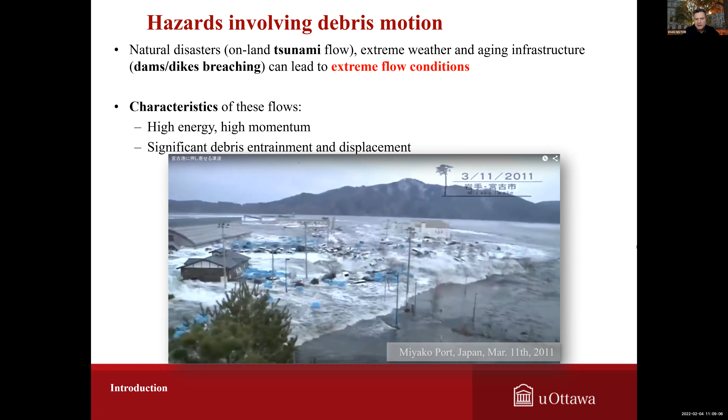This is a typical example in Miyako Port, a very small city on the coast of Japan, during the March 11, 2011 tsunami, where you see a lot of entrainment of containers and also cars located in this area.

So in terms of research problem, we're interested in debris loads and effects. We have two aspects: one is debris impact, single debris impact in the form of a dynamic load, so debris carried by the flow and impacting the building, as well as debris damming.

I'm going to illustrate what that means. It means the debris wrap around, for example, a structure, or accumulate on a piece of infrastructure, and then they exert a static load as the flow pushes in. They expand the area and the drag of this building. There is some flow acceleration effects, as well as scour induced around the building that can lead to failure.

Now, when we try to evaluate the influence of the debris, this is very difficult because, first of all, it's difficult to identify their location in the field and what happened to the buildings, because often buildings failed as a result of the debris impact.

There is a strong random nature of the debris motion, so it's hard to predict precisely how the debris are going to move in such a turbulent event. It's also hard to determine what the debris source was, unless we had pictures from before the event, and sometimes we did.

Also, due to the transient nature of the debris motion, they move sometimes erratically or randomly. We have sometimes faster flows, slower flows, and with the inertia associated with the debris and the presence of obstacles, it's difficult to assess their motion.

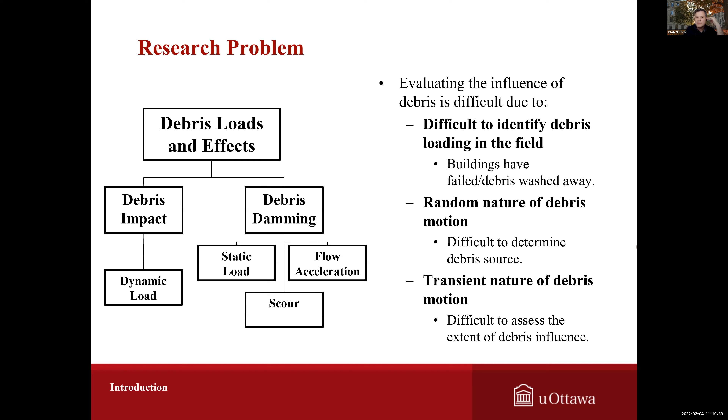Just a few words about tsunami for some of you that may not be familiar. I've done my PhD in Japan more than 25 years ago, and that's when I became interested in tsunami.

I come originally from Romania, a country that has only about 250 kilometers, or 150 miles, of coastline. So we have no debris, barely any big storms. But I was very curious about tsunamis because I was living in Yokohama.

The first training I did as a grad student was the training for tsunami and the training for earthquake, together with all the other international PhD students.

It comes from the Japanese word tsunami, which means harbor waves, because the Japanese noticed the occurrence of these waves whenever they came silently, since they didn't have any warning systems at the time.

But for the case of Japan particularly, people were able to somehow identify that whenever they had a large earthquake, possibly along the coastline, there would be a large tsunami. So people would be able to take refuge on higher ground.

One big exception was 1960, where the big earthquake in Chile, the largest earthquake ever recorded in recent decades, generated a tsunami that traveled almost 24 hours across the ocean and flooded regions in Tohoku, and people were actually killed in Japan because of this tsunami. From that time on, people installed tsunami warning systems in the Pacific Ocean.

So what happened in the case of the Tohoku tsunami, and how do tsunamis occur? Essentially, we have two tectonic plates. For example, the Pacific plate, just east of Japan, is being subducted by the Eurasian plate to the right, where we have Japan.

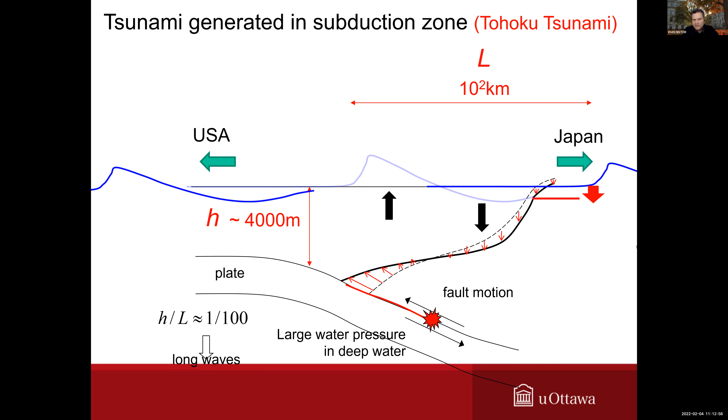That's why they're called long waves. In the case of wind waves, many of you working in marine science would know that in deep water conditions they perform according to linear wave theory. You have circular motion, and deeper down, you have less effect from the presence of the waves.

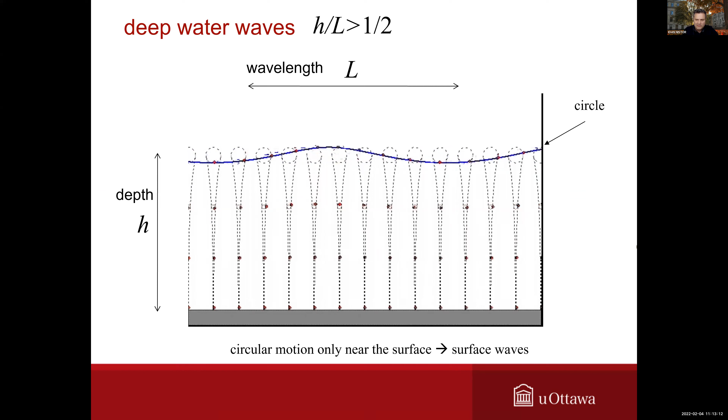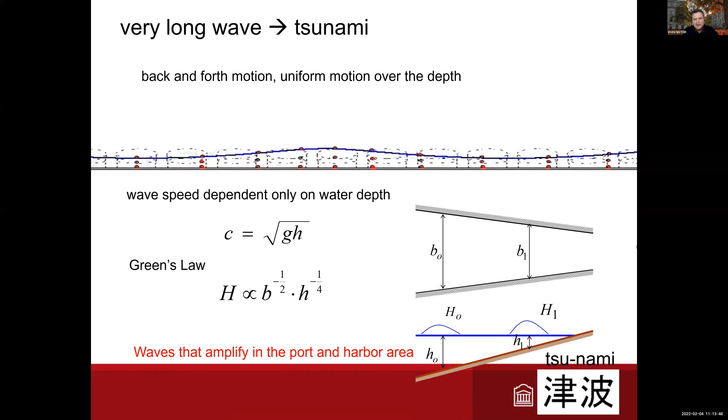However, in the case of tsunami waves, the wavelength is very significant, on the order of kilometers, tens of kilometers, or even hundreds of kilometers. So their velocity, the celerity, the speed of the wave, is only dependent on water depth. Therefore someone can calculate the arrival time of the tsunami, and that's what the initial models were based on, if we know where it occurred in the ocean and know the bathymetry along the transect to that particular epicenter. In the vicinity of the shoreline there's some amplification.

This is something we've done for kids at school with one of my colleagues, Professor Murty, one of the pioneers in tsunami research. Essentially, the uplift of the bottom of the ocean generates a relatively small wave on the surface that travels at high velocity, because velocity is a function of water depth. They propagate almost as a shock wave throughout the ocean.

Two things happen as tsunami waves propagate towards the coastline. The volume of water displaced by the uplift of the ocean bottom gets squeezed by the upsloping bottom. Physically, if you sat on top of a tower, you would see waves form and become bigger as you watch the ocean. It's an interesting phenomenon—if you had a very high tower, you would see them literally appear from out of nowhere.

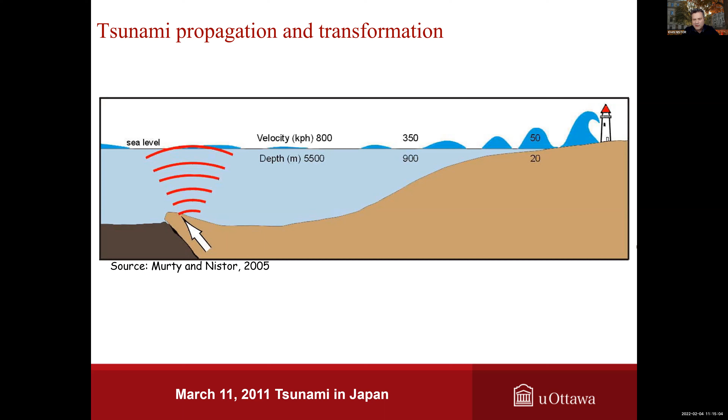The wave height increases while the velocity, the speed of the wave, decreases. The only thing that remains constant is the wave period, which is on the order of minutes or tens of minutes. As they propagate towards the shoreline, they break and inundate the coastline. Now, the breaking wave you see there is a physical impossibility—we just put it there to convince the children that the waves eventually break and advance inland.

In terms of tsunami coastal inundation, there's a strong similarity between wind waves and tsunami waves. Wind waves also have this uprush motion in the swash zone of the coastline. It's just that the volume of water contained within a wind wave is relatively small—the wavelength can be, say, 50, 200, or 300 meters. In the case of a tsunami, the wavelength is significantly longer, so the front of the wave breaks and the volume of water in the rest of the wave advances inland.

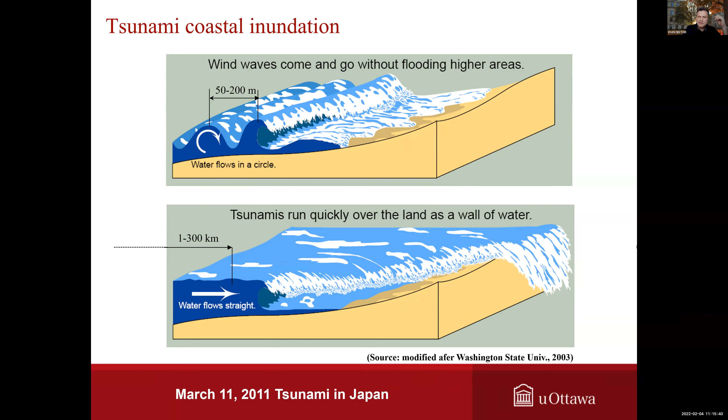So in terms of research, how did we all start this? When I went in 2004 for the Indian Ocean tsunami, we went to Banda Aceh in Indonesia, then to Thailand, then to Sri Lanka. When I came back, I was with some structural engineers, and they asked me if I could give them the pressure induced by these extreme events on a structure.

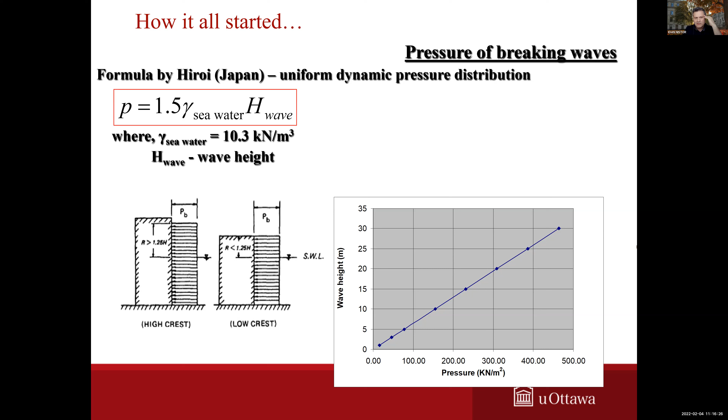So I went back and remembered the old formula of Hiroi, which gives a uniform dynamic pressure distribution with a so-called conservative value. I thought maybe we could use this, and I consulted with my colleagues in Japan—some of them were still using Hiroi's formula. But it didn't make physical sense to me to have a uniform pressure diagram over a certain water depth, so we needed to do more research.

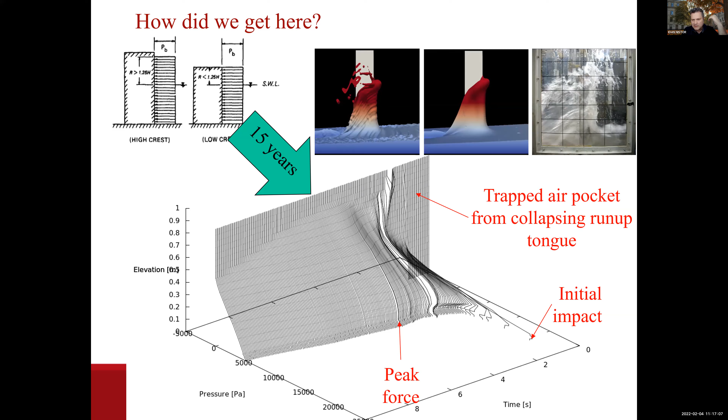How did we do this? Using physical and numerical experiments. We organized it with three components. One was forensic engineering field surveys, which provided us with a tremendous number of ideas, from debris and hydrodynamic loading to scour around buildings. With some of these ideas, we tested them in the lab—for example, a case of debris impacting an instrumented structure with a dynamometer and pressure transducers to look at the impact of the debris.

We also developed some numerical models that we were using to reproduce some of our experimental work. That's a SPH model to look at the hydrodynamic loading on the building.

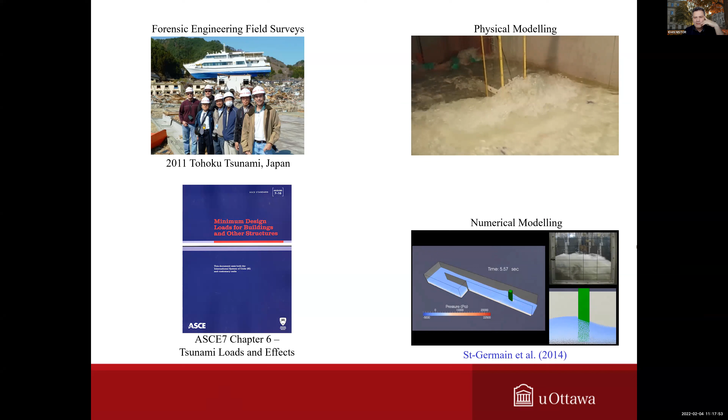The final purpose of all this work was essentially to come up with design guidelines for engineers, such that engineers are able to design structures, or critical infrastructure, which is located in tsunami-prone areas or flash flood areas.

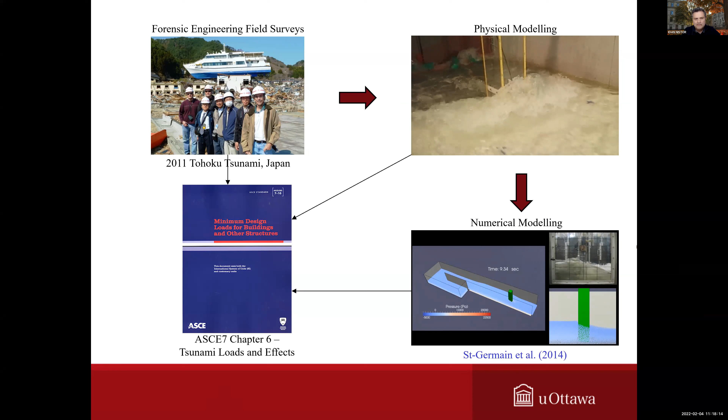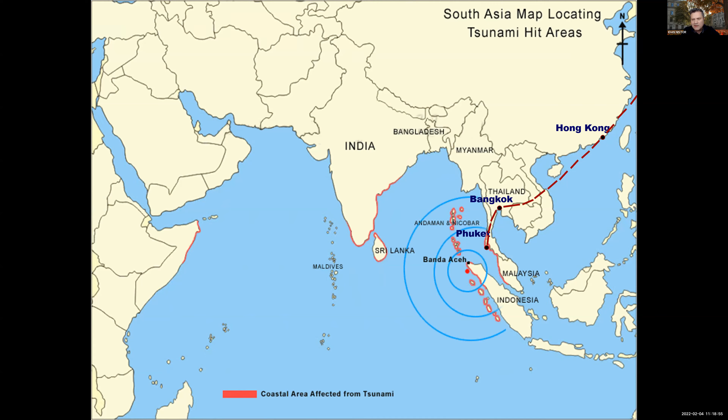At the time in the Indian Ocean, there was no tsunami warning system because the events were considered extremely rare. Just to illustrate the impact or size of the tsunami, I'm going to play a little video here, and you have some sound.

This gives you an idea of the scale. This is about 4.5 kilometers, so about 2.7 miles inland from the shoreline, in terms of the maximum run-up measured close to the city of Banda Aceh, which was 48 meters. Just to give you an idea, that was run-up, not inundation depth. The inundation depth in many regions of Banda Aceh close to the shoreline was between 15 and 20 meters. It gives you an idea of the force of this type of event.

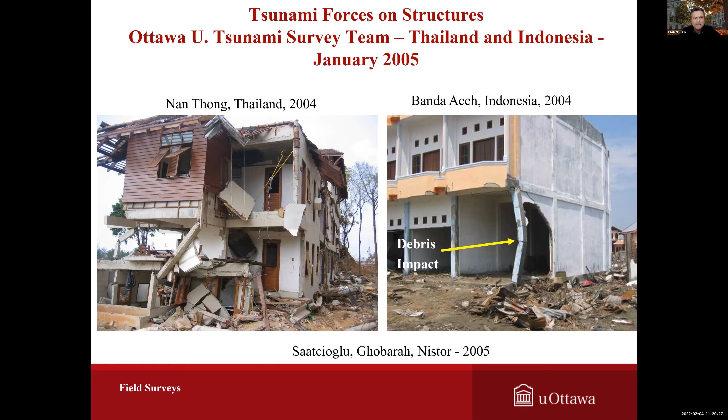By using this type of information, we decided which cities, for instance, to investigate. This was, by the way, organized under the ASCE banner.

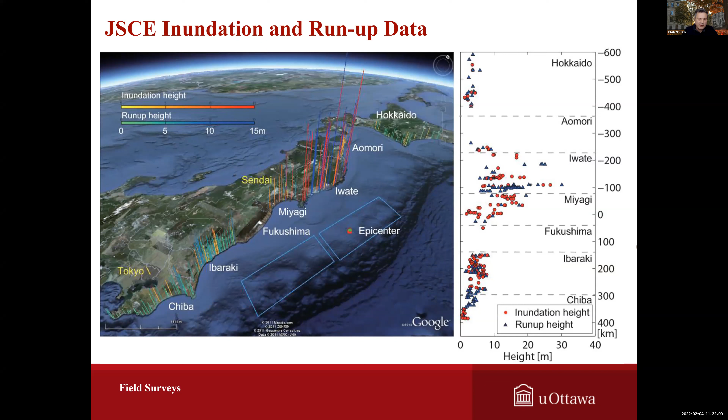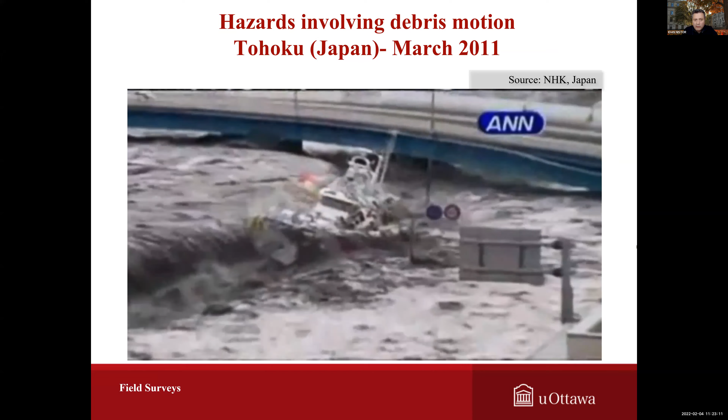Following this, some people were able to take refuge on higher ground, like the people that filmed this clip. Another 23,000 people perished during this event, although the alarm was given on time.

You can see from the same area the waves propagating inland, and you can slightly see on the other side the edge of the tsunami wall that was eventually overtopped. These are images from Sendai Airport, a few kilometers inland from the shoreline.

I had visited and took a flight from this airport in February 2011. You can see the tsunami coming in, entraining a large number of cars and vans, and large pieces of floating debris such as containers. It provides an illustration of the type of loading generated on infrastructure.

Not in the form of hydrodynamic loading, but we can see debris accumulation and debris damming. We're trying to quantify this type of debris.

During the field investigations, we made a number of measurements with respect to many things, like the spatial extent of the flooding, the water elevations, and the hydrodynamic loading.

But with respect to debris impact, we surveyed a number of interesting places where we were able to identify the size of the debris, such as this truck, which was 12 tons. We could measure some of the elements that were impacted, such as the electricity poles. We took samples of concrete and steel, and were able to trace back and calculate the velocity of the flood in this area.

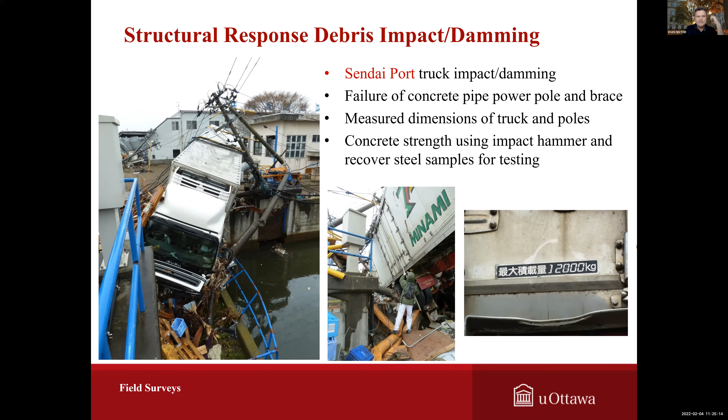A typical example of debris damming: especially after the 2004 Indian Ocean tsunami, people suggested using collapsible walls for buildings, because if the walls are collapsible, the water goes through the columns of the building and you won't have a massive hydrodynamic load transmitted to the structure.

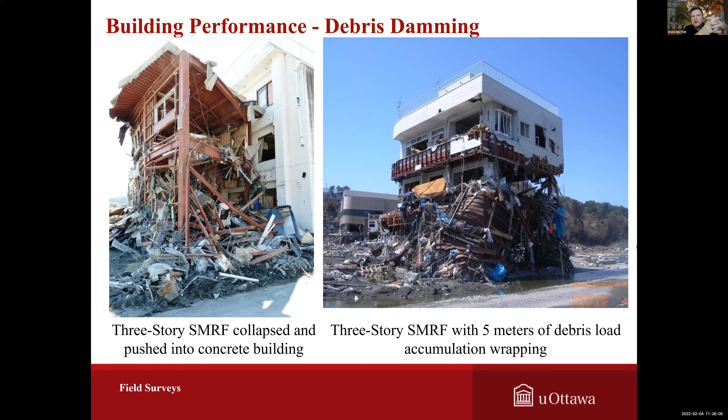Now, what we've seen over and over in other surveys, in a built environment, that's valid only for the first row of houses. As soon as you move to subsequent rows of houses, a lot of debris accumulates around the buildings. The area exposed to the hydrodynamic flood increases, and the drag exerted increases as well, so in reality you have an increase in hydrodynamic forces compared to the absence of the collapsible walls.

The other question that came was: how do we design for this type of impact? Do we design for this type of impact?

Clearly, the standard I'm going to talk about briefly now makes provisions for so-called progressive collapse prevention. For certain buildings deemed critical infrastructure, such as a tsunami shelter, a hospital, or a police station, we can design the building overall for the loading exerted by the hydrodynamic forces and debris.

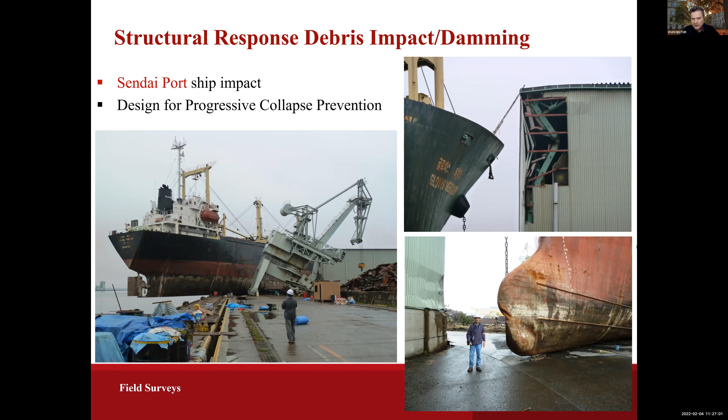But we also design for the case when a number of structural elements, such as the first row of columns of the building, are damaged. We design the building so that it still withstands and remains functional even though the first row of columns has been destroyed. So we can allow for this type of design, and these are all lessons from the field.

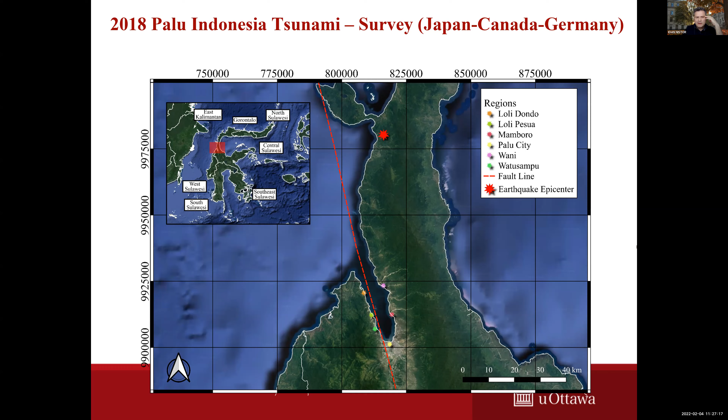A final survey I'm going to talk about briefly is the one in Palu, Indonesia, which was a smaller, localized event. Here we also looked at the impact of debris and debris damming on structures, among other things.

When it comes to standards, there were a few, and I'll focus on the FEMA P646 from 2012. It made provisions for debris impact load and calculated the maximum load. It's a deterministic model using the mass coefficient, the flow velocity, the debris stiffness, and the mass of the debris.

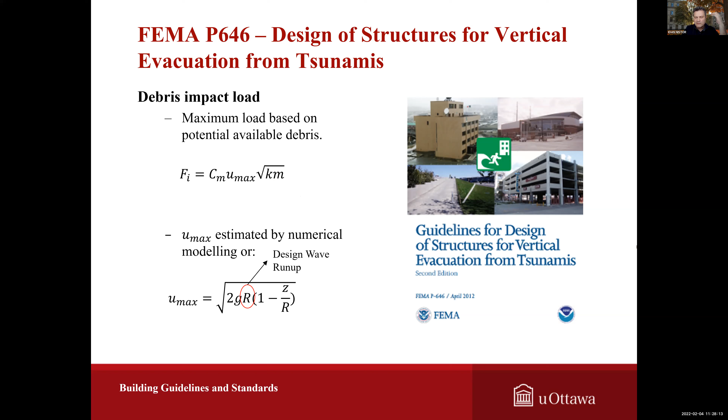By applying this formula, one can get a punctual impact point that can be applied to a structure, depending on the judgment of the structural engineer. The velocity of the water, since it's difficult to measure during an event unless we have video recordings, which only really happen in Indonesia and Japan, is estimated either using numerical modeling of the coastal flooding or using analytical formulas developed by coastal engineers based on run-up and elevation of the structure.

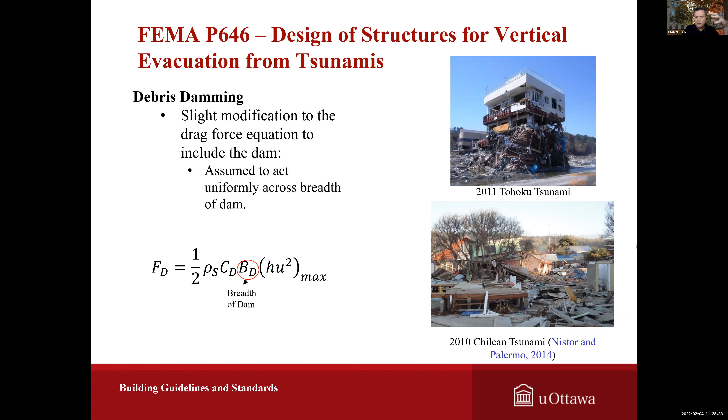They also made some provisions for damming, which included modification of the drag force to account for the increase in force. The drag force depends on the density of the fluid, the drag coefficient, the width of the structure, the water depth, and the velocity of the flow.

So when it comes to standards, why did we do this work? There was no standard to design structures against tsunamis written in mandatory language, such as the wind code or the earthquake code for structures. In 2011, the ASCE Tsunami Loads and Effects Subcommittee was established in Hawaii. In 2017, the first edition of the Tsunami Loads and Effects, Chapter 6 in ASCE 7 standard was published. The second revision was recently finalized and is now available from ASCE.

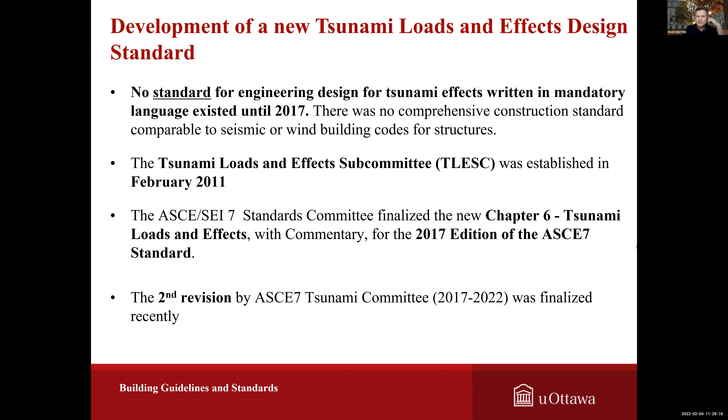In this case, the debris model is based on a 1D bar, where it assumes that the impact force depends on the importance factor of the structure. We won't design all buildings against tsunami loading, just the critical infrastructure. It also depends on orientation, because tsunamis can hit straight on, but most of the time they hit at a glance, so you have to account for that.

It depends on the flow velocity, depends also on the rigidity of the debris, and depends on the mass of the debris. For example, there's one thing when you have a big boulder of concrete that hits a building through tumbling, and there's a different thing when you have a car that wraps around a column, which has a different rigidity.

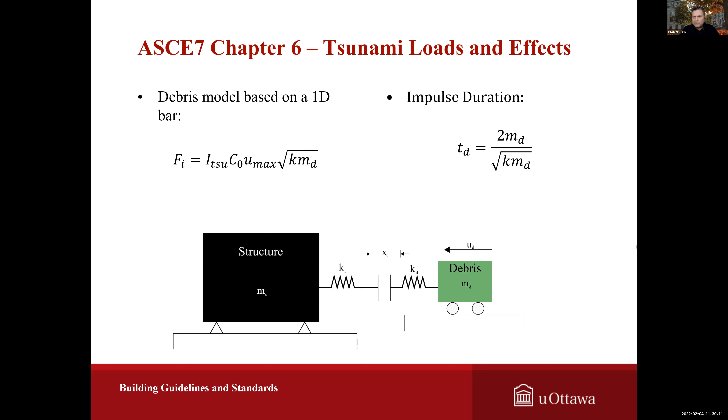Impulse duration is also important when we determine the loading on a building. So not only is the force important, but also the spreading of the debris. The new standard made some provisions with respect to how the debris spreads.

Why is that important? Because you want to know, if you design a building near an area we call the debris site, what are the chances of that building being hit by a piece of debris. And if that building is deemed critical infrastructure, we want to make sure we design for it.

The assumption of the model, based on empirical data and observations from the field, is that if we have a debris site, the debris will spread at an angle of 45 degrees as the water moves in. Then when they reach, for example, 3 feet inundation depth, they come back, possibly in the form of another 45-degree cone. Everything within these cones, deemed critical infrastructure, had to be designed for debris impact.

Now, there are some limitations: it's based on limited post-disaster survey cases, and it's also site-specific, depending on the topography of the ground, and there was no experimental or numerical validation.

So one of the research efforts we conducted in the second round of revisions of the debris provisions was to develop a probabilistic framework for assessing debris hazard in these extreme flood events. Instead of using a deterministic model where all buildings in an area are hit by the maximum debris with the maximum force straight head on, we decided to do an assessment where we can determine the probability of impact.

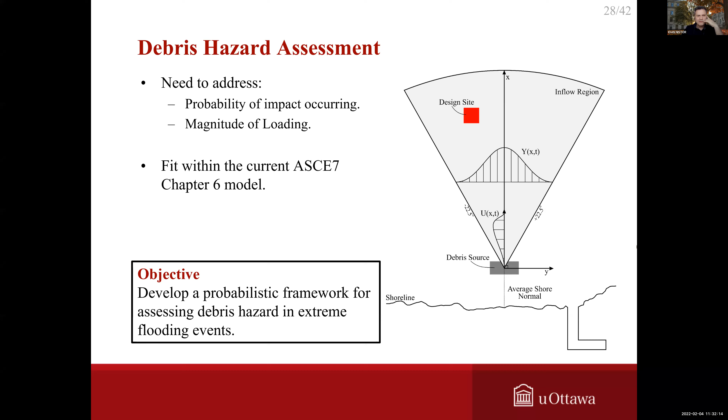So what we did, during one of my sabbaticals at Waseda University in Tokyo, where they have a small wave basin, was try to do some experimental tests to look at debris spreading. A very simple test, using the so-called smart debris system, where we modeled scaled-down, 1-in-40, debris containers, fitted with sensors we could trace with the aid of Bluetooth antennas located on the frame.

We had sensors so we could trace the motion of the debris, and also an accelerometer to determine the acceleration of the debris on the 3 axes, so we could determine the forces exerted on them. Essentially, what we did was generate a wave in front of a so-called apron of a port, a solitary wave.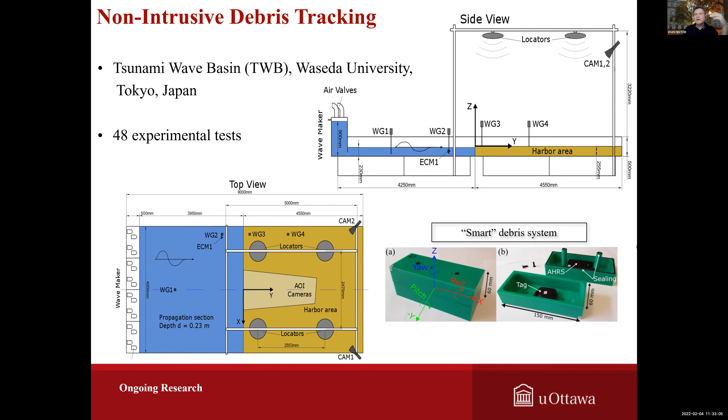The solitary wave would break at the edge here and then push the debris inside. So we also developed an optical non-intrusive debris tracking system to confirm our spatial data with the Bluetooth sensors. And this enabled us to determine the spread angle of the debris.

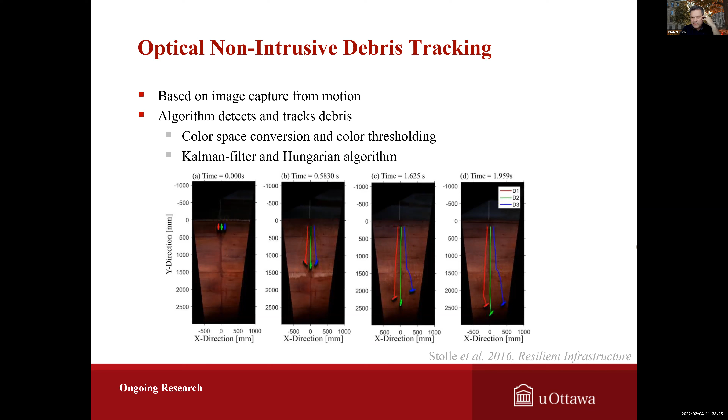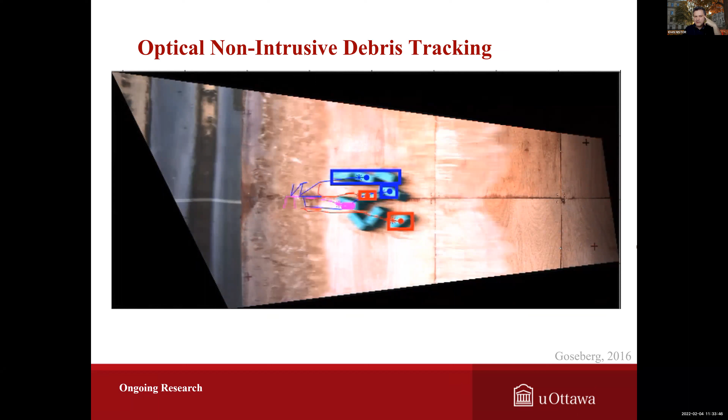So in a typical example here, what you'll see is the solitary wave coming from the left, breaking at the edge of the apron. And then with the video analysis and this tracking algorithm, we're able to determine how these independent debris were moving across the apron. The reason why we did this is that we wanted to validate some of the provisions of the standard, its first version.

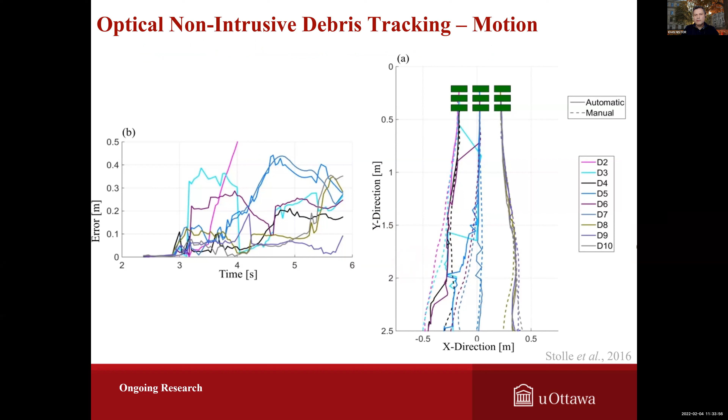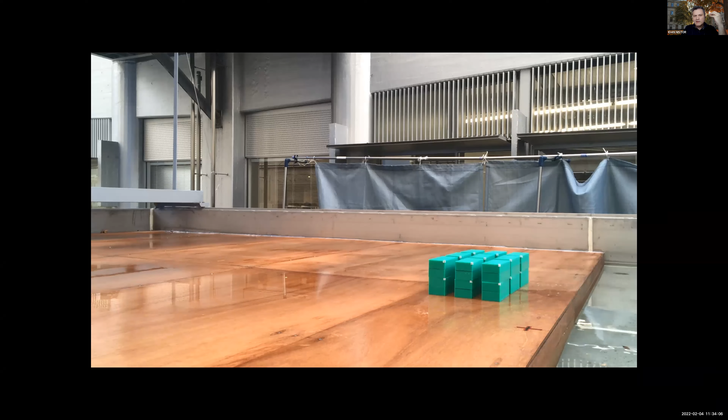So this is the type of result that we would get, with a certain amount of error in terms of debris tracking. The question that we had was, is this 45 degrees cone accurate or not? This is a typical example of the test that we were doing here. So what we came up with was this type of graphic, where what you see here is the number of debris on the abscissa and the spreading angle on the ordinate.

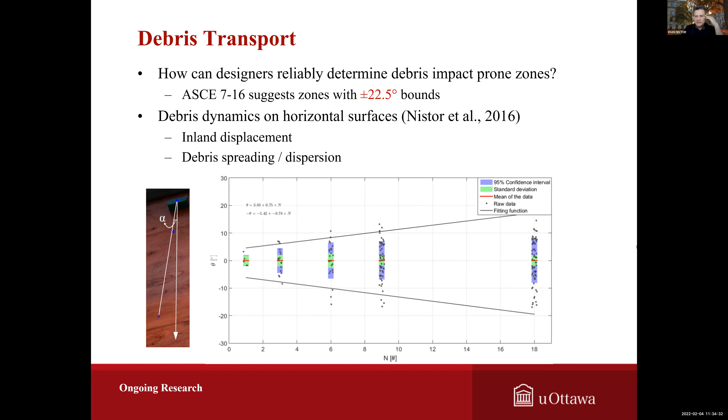So you can see that with an increased number of debris, all the way to 18, for example, in this case, you have more spreading angle because you also have a lot more debris-debris interactions and more complex interactions with the flow. We also looked at the spreading of debris in the presence of obstacles. To the left and right, you have in black the 45 degrees angle, and in different colors is the motion of the debris as they moved across the apron.

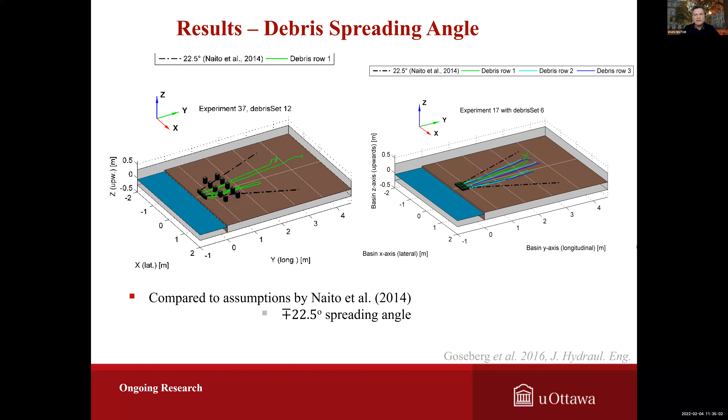So we concluded that the prescription of 45 degrees of the standard was somewhat accurate for very standardized conditions. Of course, the situation is different where you have a valley or a mountain right on the side. Some other things that we've done: at the University of Ottawa, we have a flume where we can generate dam breaks, because several researchers demonstrated in the beginning of the 2000s that the dam break wave is actually very similar to the one generated by a broken tsunami wave advancing inland.

So a lot of researchers use the dam break wave instead of solitary waves. First of all, it provides a longer duration of flow, which is closer to actual coastal flooding. And from a hydrodynamic point of view, its characteristics are conducive to simulating tsunami flows. Especially when you have debris being entrained, the solitary wave may not have enough volume to actually displace some of these.

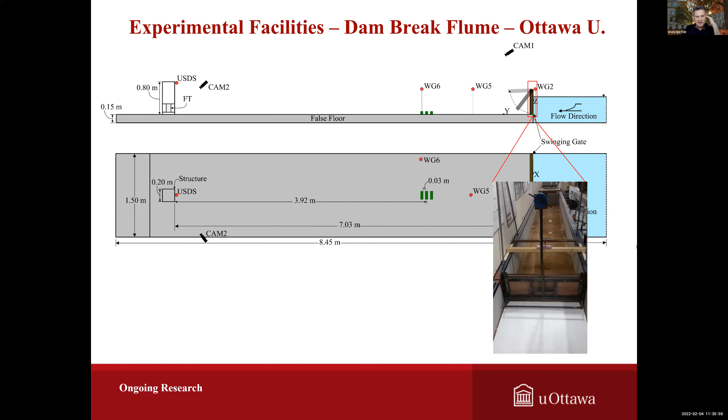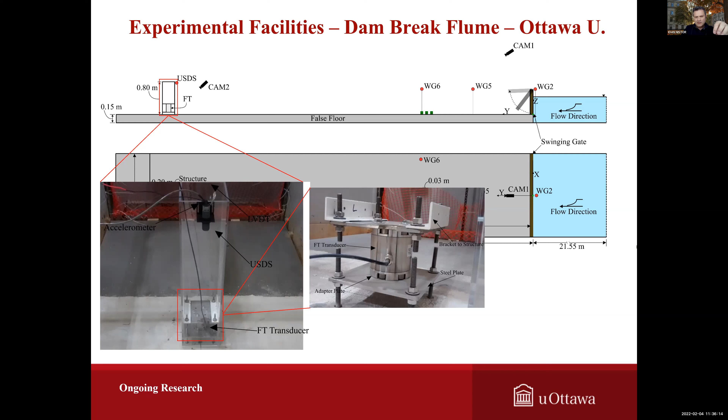So what we had here, essentially, we have a new flume now. This is the old flume; we have a much bigger flume with a big tsunami gate. But essentially, we had a column installed on a dynamometer that can measure the impact force, pressure transducers, and ultrasonic wave gauges to measure the water level around the column. This is the load cell at the base of the column.

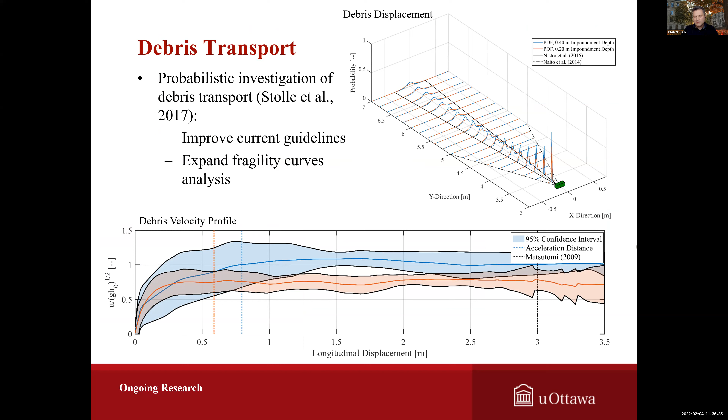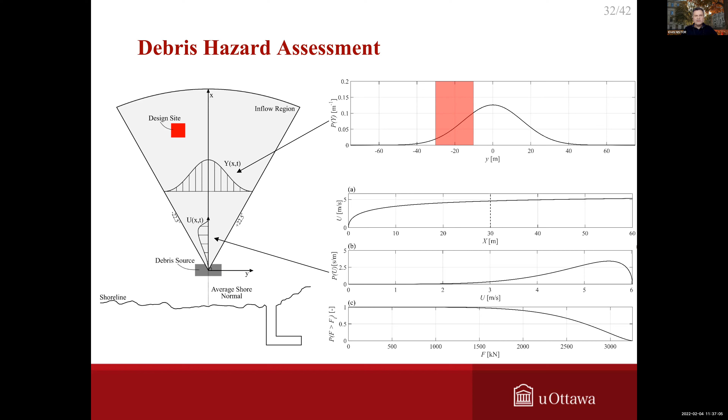And in the end, what we tried to come up with was a probabilistic formula with respect to probability of impact and force when a debris is moved from one location inland by the bore. So essentially, we came up with some curves that provide the probability of impact at this location from a debris source. They give a probabilistic assessment of the velocity of the debris as they move inland, and also the probability of the force reaching a certain value depending on the initial location of the debris and the spatial extent of this location.

In terms of the debris impact load, we're trying to solve some other issues. We try to consider the debris velocity orientation, which is not considered properly in the current standard. And we also need to examine the influence of multiple debris. That's the reason why we do this type of testing, where we're trying to simulate the impact of multiple debris. The current standard makes provision for one debris impact, and we're trying to develop this probabilistic approach for the possibility of impact and the force exerted on the building, depending on the type of debris.

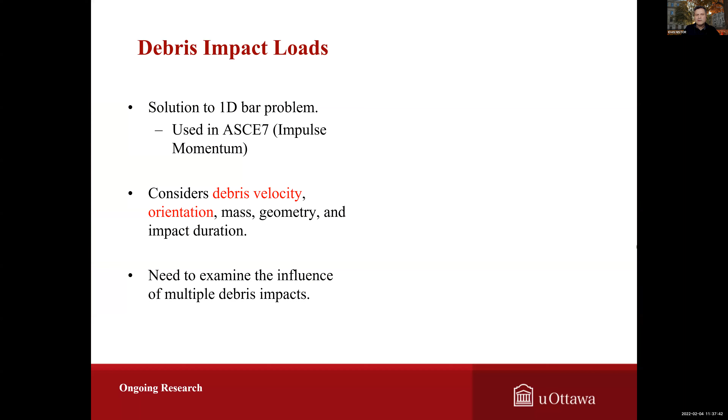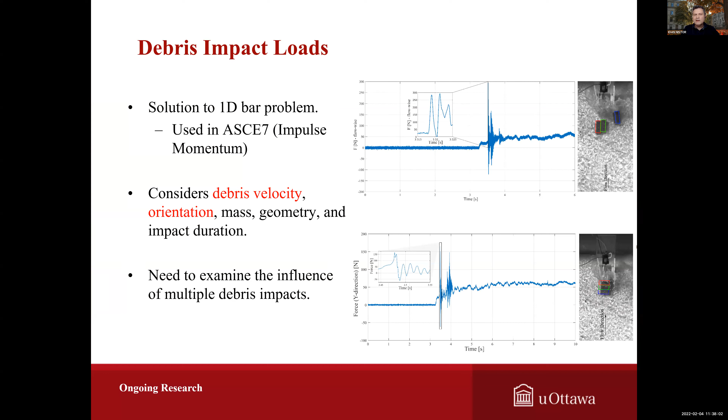The way we do this is using the same type of dam break method, and we're able to isolate the impact of multiple debris on a column. Sometimes you have the bounce back and a second strike that occurs as a result of this debris, and this again is not being considered in the current standard. We're doing some investigation now on the debris damming loads, and there are two aspects.

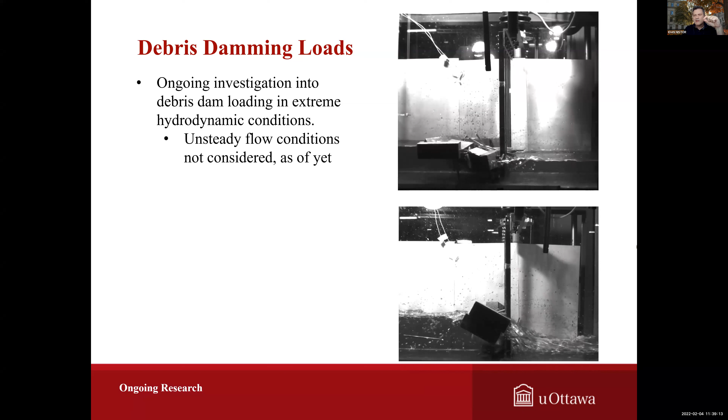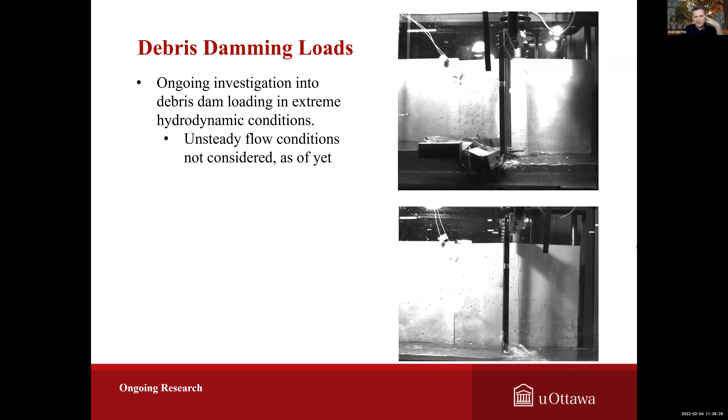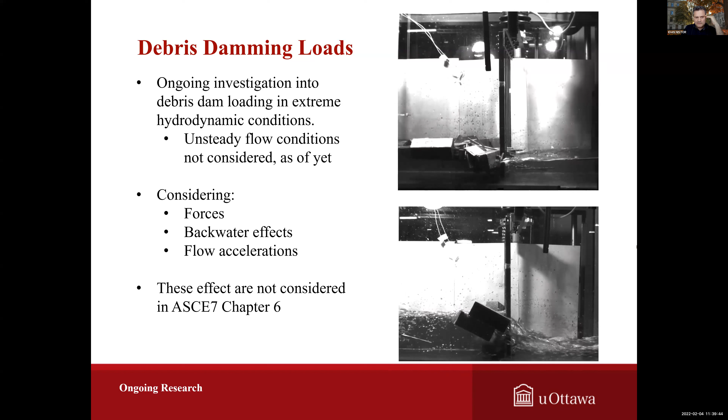We do some numerical modeling as well, and this is a typical example of an SPH model of the experimental simulation that we conducted in Japan. What you see here is a stacking of the debris in the form of the containers. And you'll see the formation of the solitary wave from the right, and then they're being pushed over the surface of the apron by the wave that forms.

And again, this one here, oops. Normally we would have to see them being pushed in, and yeah, it doesn't allow me to get past that.

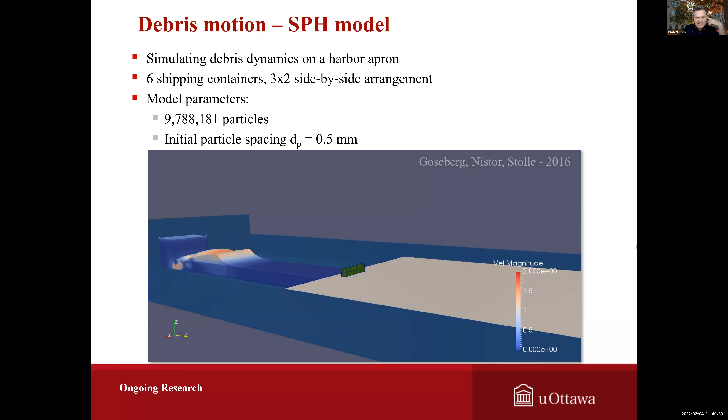Okay, so other things that we do with this numerical model, essentially we're trying to look at the type of impact. We have different impacts depending on the hydrodynamic characteristics and debris location and the structure location. And we want to account, for example, for the impact of debris, the orientation, the subsequent force exerted as a function of the impact and the flow conditions.

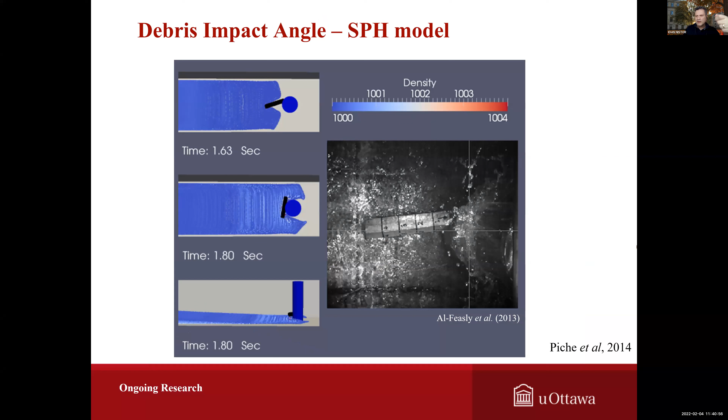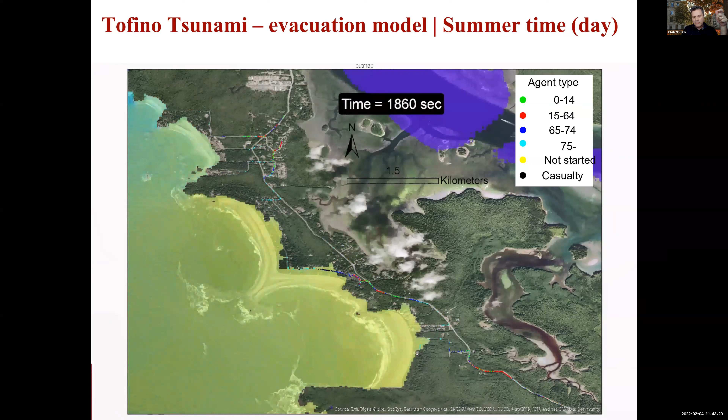And now you will see people have started running and evacuating, but you'll see that the big wave, there's a withdrawal, and then there's a big wave coming in very fast. And what you're seeing in dark spots here are all considered casualties. So you can actually see along some of these routes, a lot of the people have already theoretically lost their lives. Now, this type of tool will help the local community to actually plan for better evacuation routes.

Or, for example, let's say this is called the Chesterman Beach. Maybe in this area, we recommended the location of a tsunami shelter in the form of an elevated platform, so that people do not have to trek through the forest to the higher ground in this particular area.

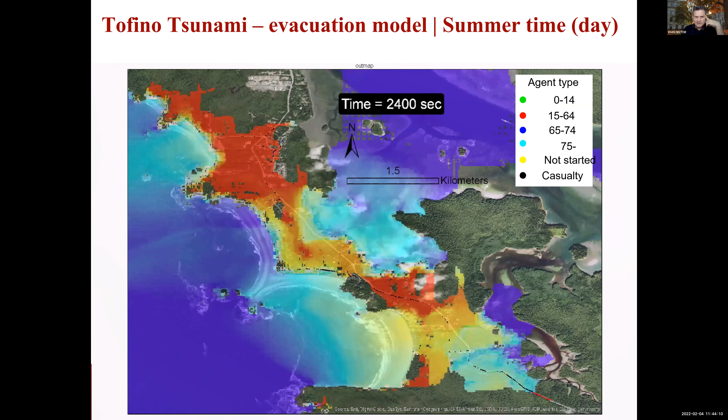So some of the engineering lessons: first of all, when it comes to field investigations, one thing we learned is that the current design standards do not properly consider the loads associated with tsunami events, debris-induced loads and effects, which are critical to design when it comes to structures.

In the case of experimental research, it's difficult to assess the transport and load, mainly because of the random nature of the debris. So you have to do a lot of repetition, and that's why we decided to go to a probabilistic approach to assess the chance of impact and the size, the magnitude of the force, depending on the distance and location in space from the original location of the debris. We're trying to move towards this probabilistic approach.

In terms of design standard, significant improvements have been made in the second round of the standard based on research that has been conducted, and some of it I've shown here. And in terms of future research, debris damming and multiple debris impact remains a significant item of research, and we're trying to focus on this. And there's very little on unsteady state flow conditions when it comes to debris.

And additional influences such as added scour due to the presence of debris dams, for example, or flow accelerations, are not well understood, nor are they incorporated in the standard. So finally, we're trying to develop some numerical models to be improved and validated, to be applied for the design phase. So I think these are some small lessons when it comes to debris.